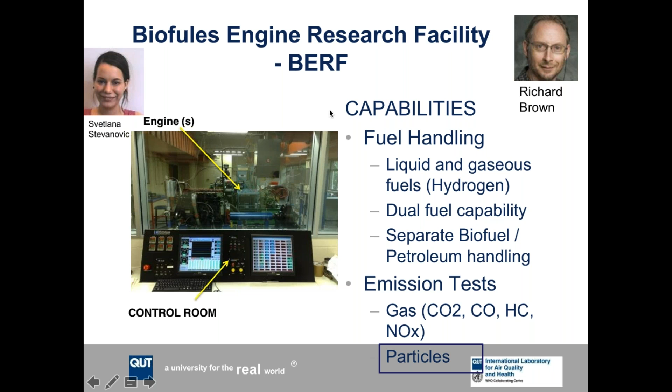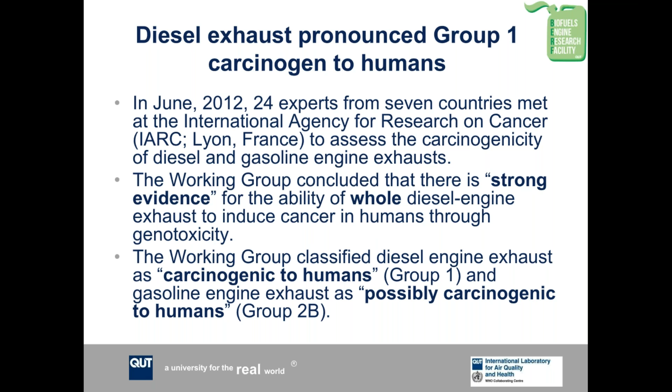So where's the interest coming from, and why are we so interested in diesel exhaust? One of the breaking important things happened in 2012 when diesel exhaust was pronounced carcinogen group 1 to humans. And also gasoline engine exhaust was pronounced carcinogen group 2B, so possibly carcinogenic to humans. This was really a groundbreaking thing because it got a lot of industries to look more seriously into the issue of diesel exhaust. And what was behind this decision was also a really groundbreaking, interesting study published in the same 2012, the Diesel Exhaust in Miners Study.

And I'm sure most of you know the background of this publication, that it was actually on hold or under litigation for years between the lobby groups from the mining industry and NIH, who was behind this. So it took them like 10 years, I think, until they got to publish it. But once it was published, it was really an important one, and it led to the decisions in 2012 by the WHO.

Also, an important point was when in October 2013 the WHO and IARC classified outdoor pollution as carcinogenic group 1, with particulate matter, a major part of this air pollution, evaluated separately. So these were all really important major studies and got a lot of the industry, especially the industry which I worked a lot with, which is the mining industry, to think twice on the quality of the fuels they use, the engines they used, and how to improve the emissions from their diesel engines.

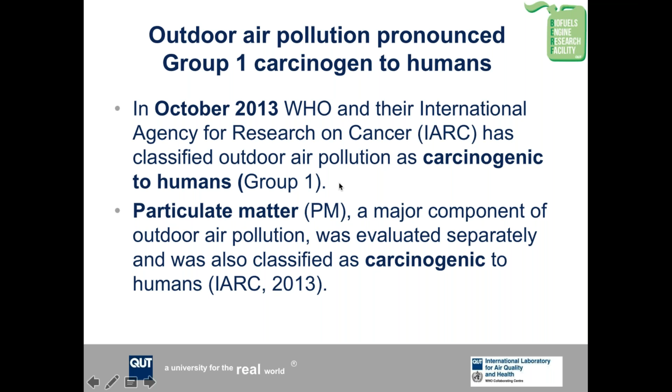So then we asked ourselves, why biodiesel? Why do we have to go to biodiesel? Well, we have to be aware that based on the current production scenario, we will be running out of oil that we dig from the ground. There are some estimates that we already reached peak production in the last few years, or we will reach it by 2030.

So we will be able to produce less and less, or dig less and less oil from the ground. So we have to find some other alternative for a sustainable carbon neutral transport. You know, we're all pushing at the moment electrical vehicles, etc., but it will still take some time before the electrical vehicles will really replace the normal fleet.

So that won't happen that soon, and therefore we have to look into the development of sustainable long-term alternatives, and biodiesel could be one of those sort of bridging stones until we come up with a totally carbon neutral or even carbon free transport, electrical vehicles, for example.

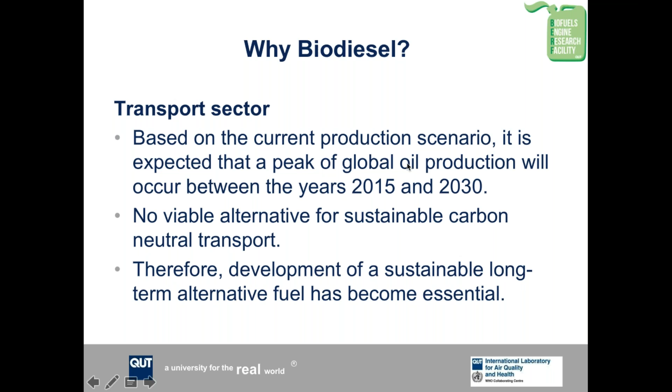One of the things that's important when we look at these biofuels is that biofuels come from various stocks, so various sources, and that also leads to a significantly different composition of the biofuel, and biodiesel specifically, as compared to your standard petrol diesel.

And the thing we wanted to look into is how the composition of biofuel first affects the primary exhaust emissions, so emissions that come directly from the exhaust, and then later on we'll talk about how the biofuels affect the secondary emissions, so the potential of the fuel to produce secondary emissions.

And the first study that we started doing in our lab was, slide to change, we looked into ethanol as a potential fuel in diesel engines. So we'll go into detail how we managed to get ethanol into a diesel engine. But let's say we had a device that enabled us to replace diesel fuel with ethanol up to 40% in energy, which means that 40% of the energy of a running diesel engine actually came from ethanol.

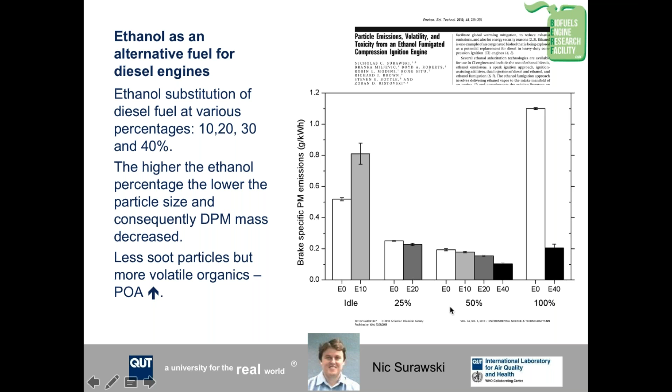And then we looked at how, at different loads, adding more and more ethanol influences the particle mass emissions. So we see this graph show up soon, yep. On the x-axis, you have the percentage of ethanol. So E0 indicates pure diesel, E10 means 10% ethanol, and up to E40, which is 40% ethanol. And the bottom part indicates the load of the engine, so idle to 100% full load.

So what's clear is that as you add more and more ethanol, your particle emission significantly drops down. Especially evident is this reduction between the particle emission at pure diesel at 100%, so full load, and when you replace 40% of the diesel with ethanol, you see a significant decrease in the total PM emission. So the question was, how is that achieved? This is almost a fivefold decrease in the total particle mass emissions.

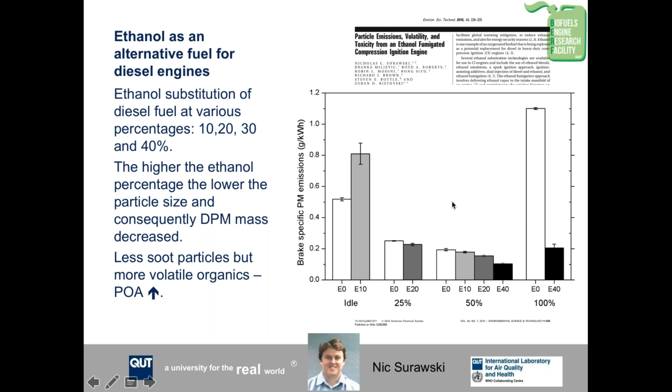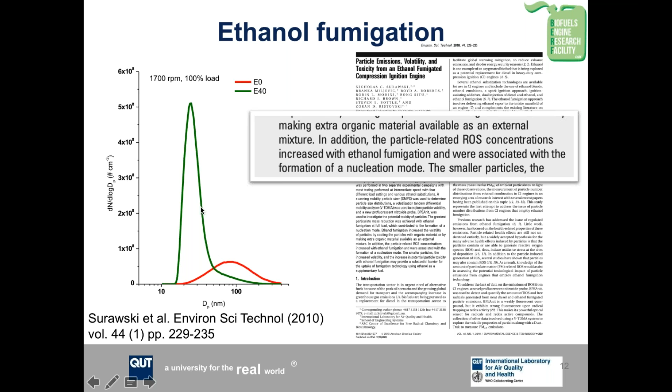And what we also saw, and we'll talk about that later, is that the oxidative capacity, let's say a measure of toxicity of the particles, also shot through the roof with the introduction of ethanol. So if you just follow purely your regulated emissions, you see that the regulated emissions significantly improved, but if you scratch below the surface, you see that there are many problems hidden there in the emissions themselves.

So then we continued in this direction and did more work where we looked at the particle emission for various different biofuels. So we used 3 different biofuel stocks, biofuels coming from soy, biofuels coming from canola, and tallow or animal fat. And then we mixed these biofuels at different blend percentages from 20 to 100% and looked at the particle emissions. And this is sort of what we got.

So on the x-axis, you have the blend of the biodiesel. 100 means pure biodiesel, and 0 means pure diesel. And on the y-axis is particle mass emissions. And we see that once we start adding the biofuels, the particle mass emission significantly goes down.

And also importantly, we see that there's a strong dependence on the stock. So some stocks, such as soy, have a smaller reduction than canola, etc. So there is some stock dependence, or compositional dependence of the emissions on the composition of the fuel.

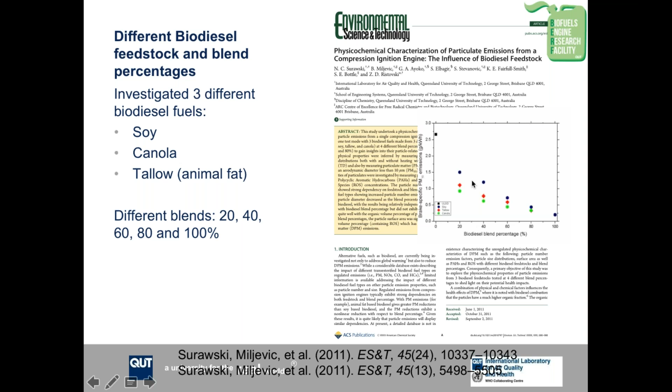So that's the particle mass emission. When it comes to particle numbers, the situation is somehow different. So we see that this is your pure diesel, and we see that even with certain blends, such as tallow or canola, you're getting the smallest particle mass emission, but your number emissions are even larger than diesel. So how is that possible? You're getting more particles in numbers, but less in mass.

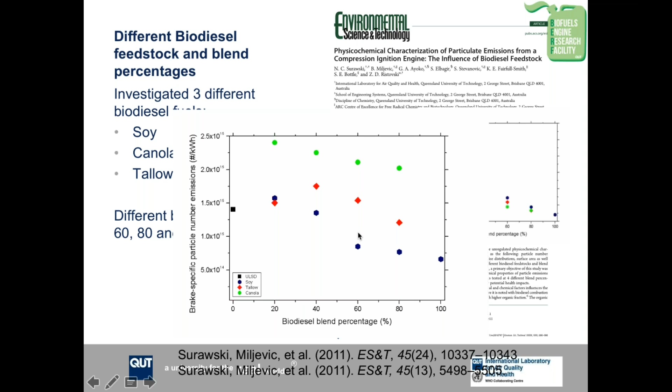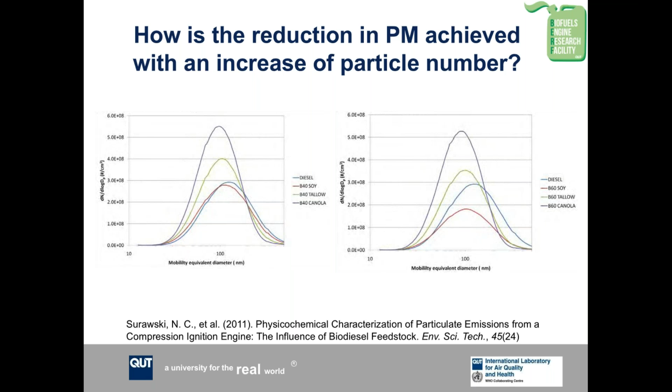So we saw that, yes, different stocks give different particle mass and number emissions, but we didn't really look in detail into the fuel composition. So then we did another study where we managed to control the composition of biodiesel in a much more controlled manner, and to look at the influence of the molecular structure, the structure of the biodiesel molecule, on nanoparticle emissions.

So for those of you who are not aware how most of your fatty acid methyl ester biodiesels are made, you start from a triglyceride, let's say tallow fat, and adding methanol in the presence of a catalyst, you break these chains and you get fatty acid methyl esters. The alkyl fragments depend on the fatty acid profile. So these are purely hydrocarbons, long chain hydrocarbons.

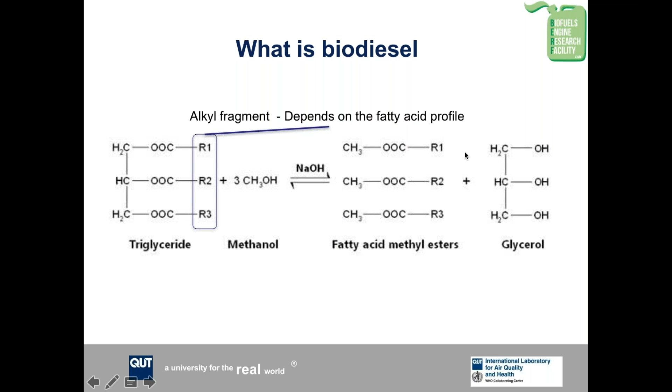So what we did, we managed to get our hands on a stock of biodiesel fuel coming from palm oil, which had controlled carbon chain lengths. So these alkyl fragments were of a controlled length. In your normal biodiesel, they're all mixed up, a mixture of various carbon chain lengths. We got more pure biodiesel, or these fatty acid methyl esters. And this just shows the composition.

So for example, our fuel, which we labeled C810, had mainly caprylic and capric acid, which had 8 or 10 carbon atoms in it. And then other fuels we had with a longer chain length, and then some fuels with a large number of different values of saturated and unsaturated bonds between the carbon atoms. So we wanted to look into how the carbon chain length in your biodiesel actually influences the emissions. So the question is, can we come up with an optimal composition of the fuel that would give the best performance of the engine, but at the same time give the best emissions?

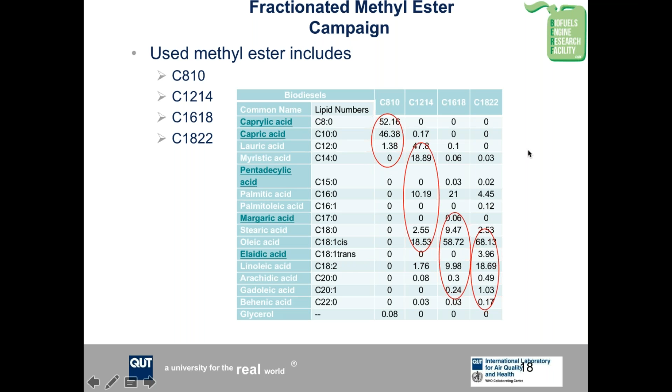So this is the molecule that we looked at, the biofuel molecule. And here we show for 2 loads. We can just look at one of the graphs. So we have the different fuels, 8 to 10 carbon chain length, up to 18, 22 carbon chain length. And this is the brake specific particle mass emission. So the more biodiesel fuel we add, so this is pure diesel, 20, 50, and 100% biodiesel, we see a significant reduction in the particle mass emission.

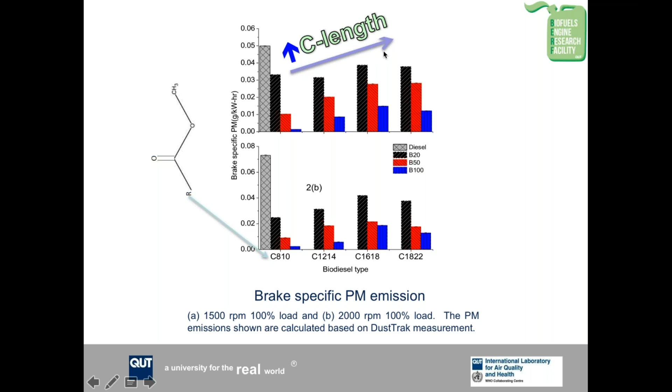But what is also interesting is that the shorter the carbon chain length, the smaller the mass emission for all possible blends. So when the carbon chain length increases, so does the mass emission. So what happens with the increase of carbon chain length with this oxygen? This carbon chain length becomes longer and longer, which means that the percentage of the oxygen in the whole molecule actually goes down. So if the oxygen percentage goes down, the PM goes up.

But also we see that if we have more unsaturated carbon bonds, the emissions also go down. So what you would want to have is a fuel with the biggest oxygen content and with the largest number of unsaturated bonds in between the carbons. And that improves your particle mass emission.

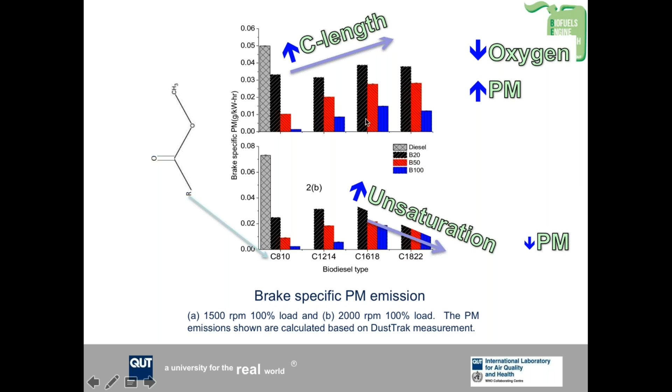So when we put that together, for all the fuels we tested, we found an interesting property, and that the specific particle mass emission in our case was proportional to the oxygen content in the fuel. So the more oxygen you had in the fuel, the smaller the mass emission. And actually in this case, an interesting thing is that the particle number emission also went down. So you were not only getting smaller particles, you were also getting less of them. So that was a fairly important thing.

We looked at other fuel properties and found that other fuel properties really didn't have a significant influence on the particle mass and number emissions. The trade-off is that your fuel consumption unfortunately goes up with the fuels with a higher oxygen content. So although you're getting better emissions, you are using more fuel. So that's the same slide with the particle mass emission.

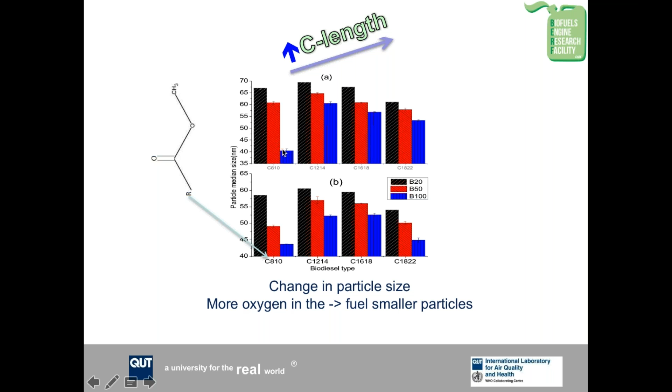So the question we asked ourselves is, why are particles becoming smaller? What makes the soot particles from biodiesels smaller than particles coming from your normal fuels? So we did a study where we collected these particles on transmission electron microscope grids and then looked at the structure and the size of the particle. This is a typical example of a biodiesel particle.

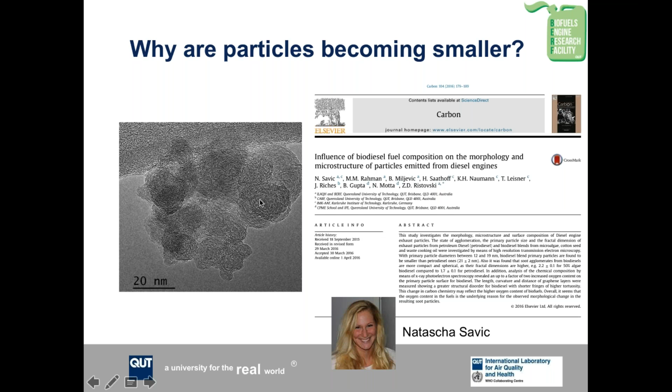So what you see is that it consists of these smaller primary particles. They are sort of agglomerates in structure. This is even nicer. So that's your typical biodiesel particle. You see they are agglomerates of primary particles. They are around 100-ish nanometers, or these were around 200 nanometers in size, and they consist of these primary particles, which are somewhere around 10 to 20 nanometers in size.

So what we found is that the more oxygen content we have in the fuel, the smaller this primary particle will become. So this is your diesel, and this is 50%. This is some diesel made out of hydrogen, I won't go into that. But with 50% biodiesel, the primary particle size was going down. And we repeated this study, and we're currently running a similar study looking in much more detail and at a larger oxygen content, and we are clearly seeing that effect. So the way biodiesel achieves a smaller mass emission is by producing smaller primary particles.

We also looked at the structures of these primary particles in a high resolution transmission electron microscope. So what you see here, this is a layer of carbon atoms. There's another layer of carbon atoms. So you see that these primary particles have this core shell structure, and the distance between the layers also depends on the percentage of biodiesel, with biodiesel having a smaller distance between the layers.

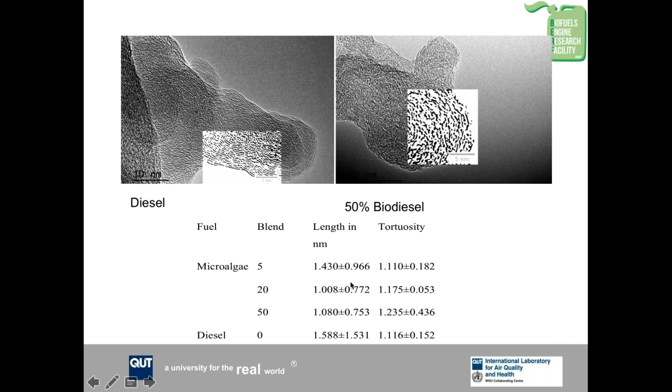But what's more important is that we found that in the soot emitted from biodiesel, the bonding in between the carbon atoms is more prone to so-called sp3 hybridization than sp2 hybridization. What does that mean? That means that the atoms in soot coming from biodiesel have more of an amorphous structure than atoms in soot from diesel engines, which have more of a graphitic sp2 layer structure.

But also important is that biodiesel soot has a much larger percentage of oxygen atoms on its surface, which means the soot is more oxidized. And this could be one of the reasons that a number of studies have found that cells exposed to soot with larger oxygen content on the surface show a bigger response and it seems to be more toxic. So we are now repeating this study in much more detail just to confirm if this is valid for various biofuels. This was done only for one type of biofuel.

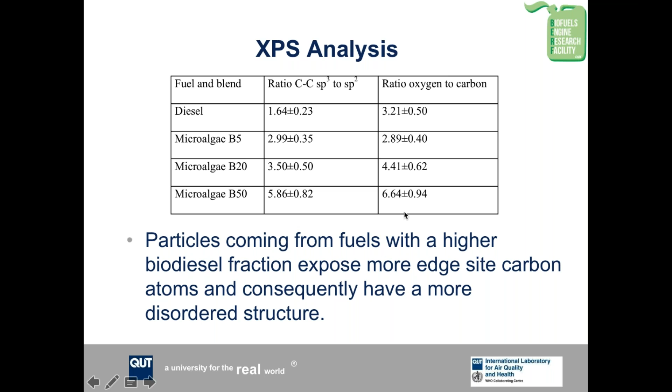We also looked into characteristics of engines running biodiesel in transient emissions. All the previous studies were done at steady state. So you load the engine at a constant load and you run it, and then you look at the particle emissions. Then we also looked at transient, so how you drive the engine in normal conditions. On the road, you would go faster, slower. And then we looked at the advantages and disadvantages of having biodiesel. So the main advantage, again, is that your PM and PN number, particle mass and number emission, goes significantly down.

But the disadvantages are the known ones: NOx goes up with biodiesel, and also a significant decrease in engine power, which means there's more fuel consumption in the whole thing. So this was all purely looking at particle physical properties.

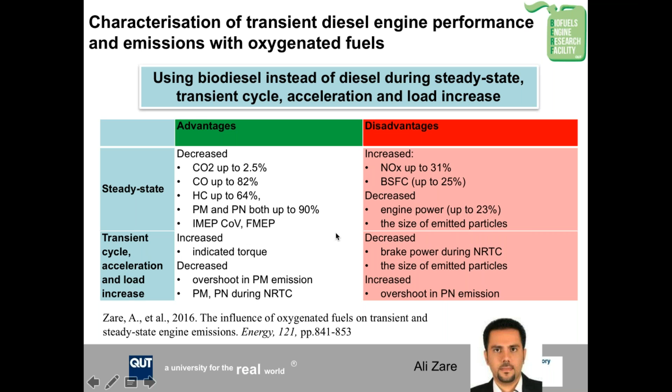So let's make a small stop and a digression, and I'll talk now on the relationship between particulate matter and health effects, and how we developed methods to measure or to estimate the oxidative capacity of particles. So why is the oxidative capacity of particles important?

Because one of the proposed mechanisms of why particles, any particles, are toxic, and specifically combustion generated particles, is that the particles carry on themselves free radicals or reactive oxygen species. Once they get into contact with human cells, they cause oxidative stress, which leads to inflammation, cell injury, and eventually death itself. So the measure of the reactive oxygen species should give an indirect way of measuring the toxicity of the particles.

So I'll skip one slide. So our motivation was, as I said, to develop a cell-free assay, an assay which we would use without the presence of a cell for routine screening of the oxidative potential of particulate matter. So looking at what oxidative stress a particle would be able to put upon a cell once it enters the cells. And we are also developing monitors of that.

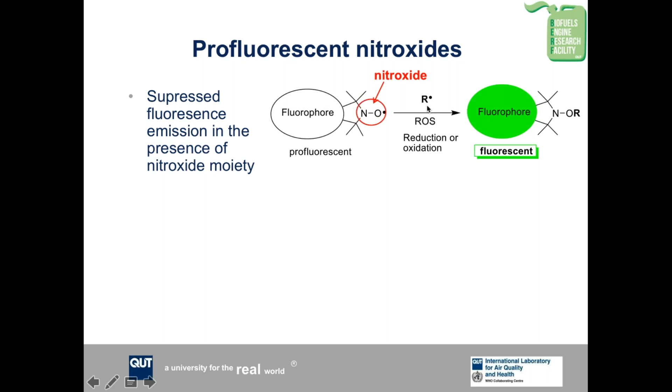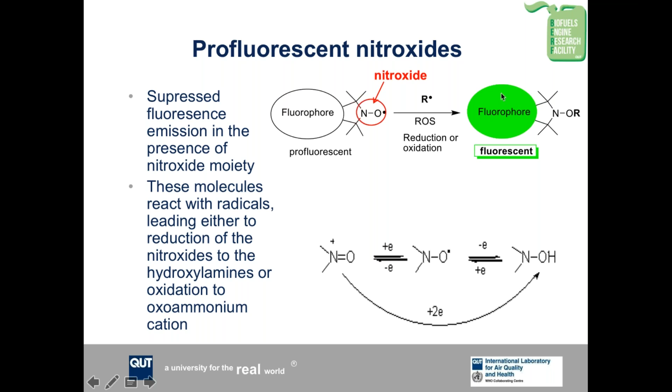So if the profluorescent nitroxide reacts with a molecule of any kind of ROS, then it will become fluorescent. And that's the process, simple as that. What we have to do is find a way to get the reactive oxygen species on the surface of the particles to react with these nitroxides, and then measure the change in the fluorescence. So to do that, the fluorescence of the fluorophore is really important.

If you want to apply this method to measure the oxidative capacity of combustion generated particles, specifically diesel, your fluorophore has to have an excitation wavelength which is not too low, so you would not initiate the natural fluorescence of diesel or any kind of combustion aerosol. So the natural fluorescence of combustion aerosols will not overlap with your fluorophore fluorescence. And for that reason, we found that the most optimum molecule is this one. I can't even say the full name.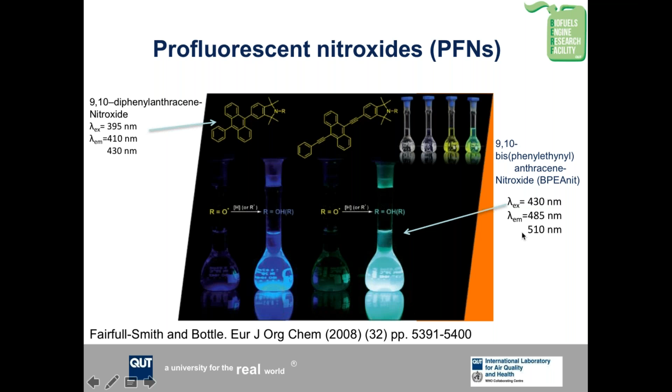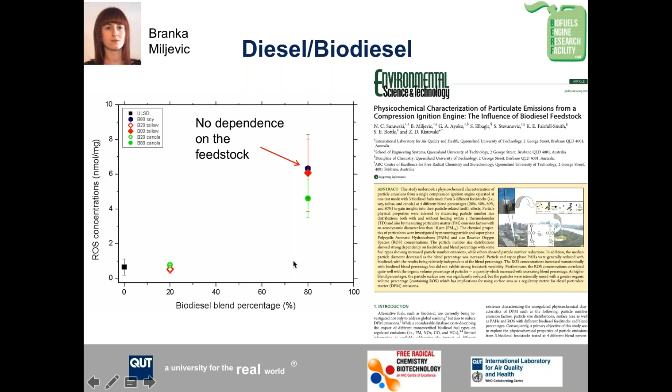So going back to the measurement that we did with the biodiesels of different composition, if you remember, the particle mass emission goes significantly down, but what we found is that the concentration of reactive oxygen species per milligram of particulate matter significantly goes up with more biodiesel in it. And interestingly, we didn't see any dependence on the feedstock. So the more biodiesel you have, less particle mass, but the oxidative capacity is larger. We found an interesting correlation between the organic volume percentage on the surface of the particles and the concentration of reactive oxygen species.

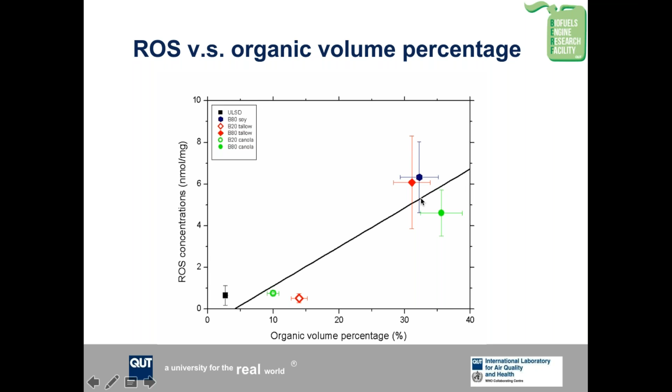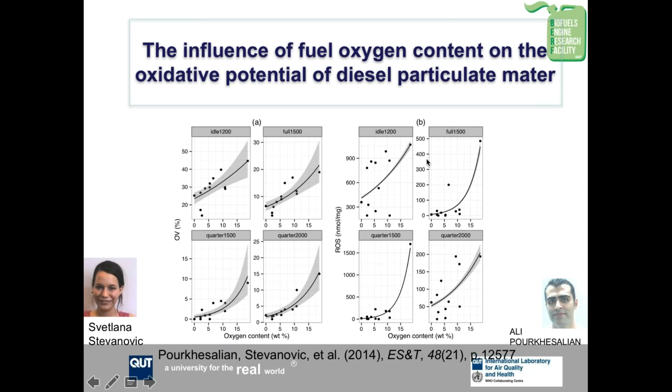So if we try to plot the amount of organic material on the particles versus the reactive oxygen species, the oxidative potential of particles, we actually didn't get a good correlation.

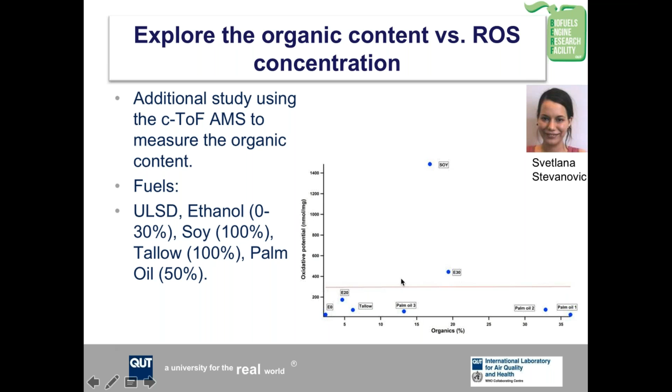So this is the percentage of organics for various fuels tested, and this is the oxidative potential expressed as concentration of reactive oxygen species, and we see the correlation is a little bit all over the shop. So what we did is we looked at the actual chemical composition of the organic materials that are on the surface of the particles using our aerosol mass spectrometer.

And with this device we use two specific m/z values, m/z 44 and m/z 57, when we look at the composition of the organics. This is the m/z mass. m/z 44 is a marker of the so-called oxygenated organic aerosols, and m/z 57 is a marker of hydrocarbon-like organic aerosols.

So what we find is that with more biodiesel, the larger the fraction of oxygenated organics is versus the non-oxygenated, the hydrocarbon-like organics. Then we said, okay, is there a correlation between the amount of oxygenated organics and the reactive oxygen species concentration or the oxidative potential?

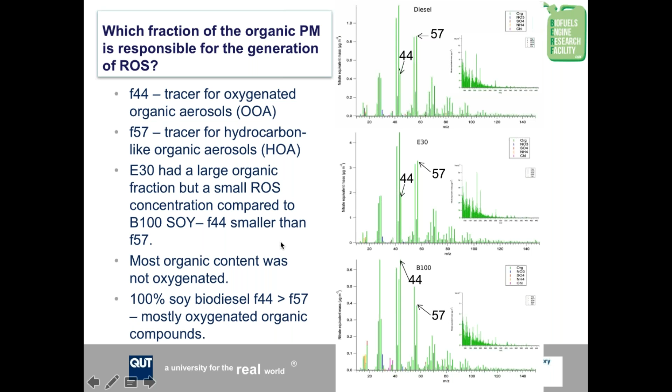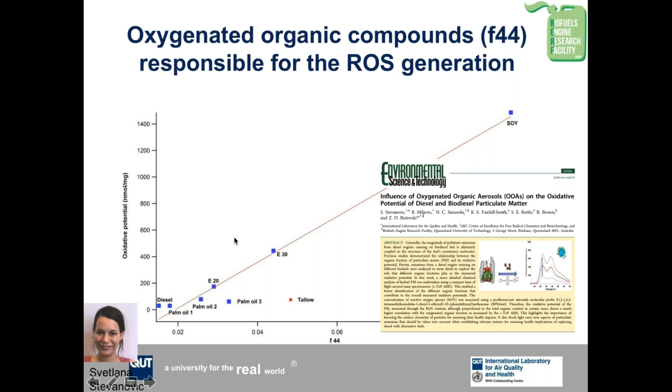And when we put the percentage of oxygenated organic aerosols on the x-axis, so what fraction of your organic material on the surface of diesel is oxygenated, we got a nice linear relationship for some of the fuels we tested. So the more oxygenated your organics are, the higher their oxidative potential is. And we repeated that study with various different fuels, and every time we get sort of a nice correlation between the F44 fraction of oxygenated aerosols and your oxidative potential.

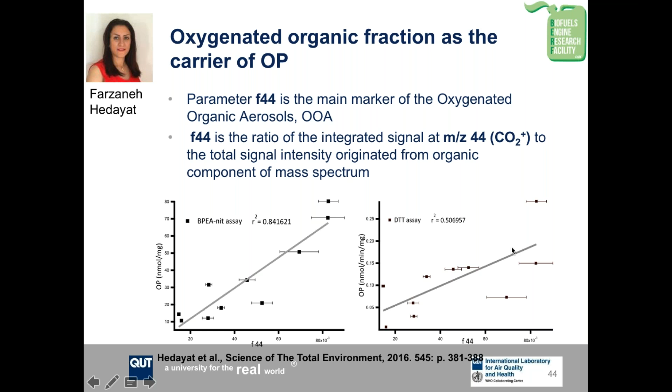And we even tried that with different types of assays to measure the concentration of reactive oxygen species, such as the DTT assay, and we always find a similar or fairly good correlation independent of the assay we use. And that also confirmed that the oxygen content is fairly proportional to the oxidative potential in the fuels that we have tested, and that the oxygen content is also proportional to F44. So the more oxygen you have in the fuel, the more oxygenated organic aerosols you will have on the surface of your particles.

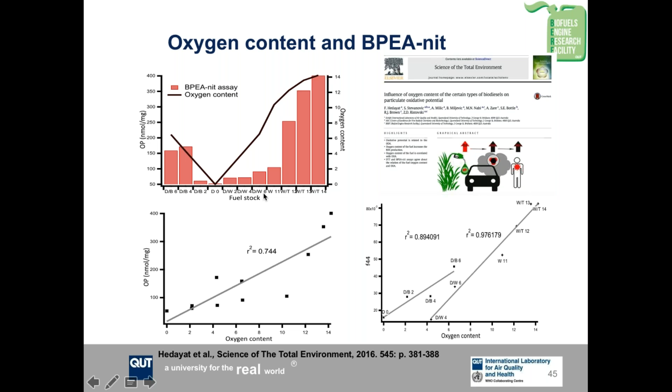And what we see, the more oxygen in the fuel, the more oxygenated your organic material will be, and therefore more of it will stick to the particle phase. So more oxygenated organics have a smaller saturation vapor pressure, and they more easily condense onto the particles, but they also increase the concentration of reactive oxygen species. So in fuels with high oxygen content, most of your reactive oxygen species is in the particle phase, and less in the gas phase.

But this also raised the issue of the importance of the concentration of reactive oxygen species coming from diesel or any kind of combustion emissions in the gas phase. It is still significant. So to summarize, the ROS concentration, although proportional to the total organic volume percentage, shows much higher correlation with the oxygenated organic fraction.

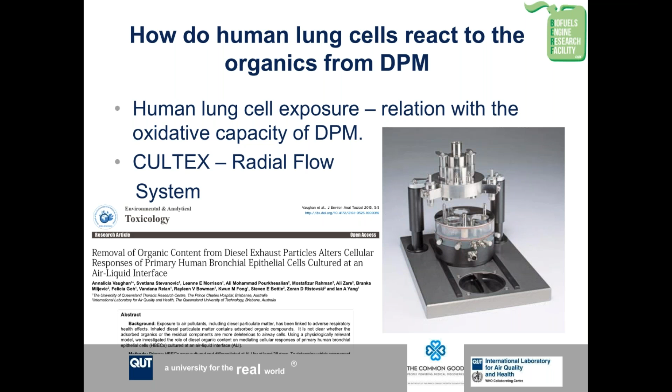And to confirm this, we continued, and I'll have to be quick going through these few remaining slides. We did some exposures of human lung cells as well. So I wanted to look at how human lung cells react to organics from diesel particulate matter. For that, we use a Cultex system where we are able to directly expose the human lung cells to diesel exhaust. So we don't capture diesel exhaust into liquid and then mix that liquid with the lung cell culture, but we directly expose the human lung cells to a flow of diesel exhaust.

So we started with our diesel exhaust with the organics on the surface. And then we have a way to remove these organics using certain methods and expose the cells only to particles without these organics. What's important is that only 10 to 20% of the mass has been removed by the evaporation or removal of organic material. And this is the response of the cells that we got.

So you have the cell viability on the y-axis. This is the baseline. This is filtered air, so diesel exhaust passed through a filter where all the particles have been removed. This is normal diesel exhaust, let's say diesel exhaust with the organic material. And this is diesel exhaust with the organics removed.

So we see that the viability of the cell for short-term 30-minute exposures was much larger when we removed the organics. When we went to longer exposures, the situation actually changed. We are not sure what was the reason for this significant difference.

Another important thing, tying these organics to the oxidative capacity, is when we looked at the concentration of IL-6, which is a marker of how much the cells were stressed as a function of different exposures. We see that when we expose to neat diesel, meaning diesel with the organics on the surface, the concentration of IL-6 is significantly larger than with the organics extracted. So we can tie the organics on the surface to the stress or the reactive oxygen species that they carry.

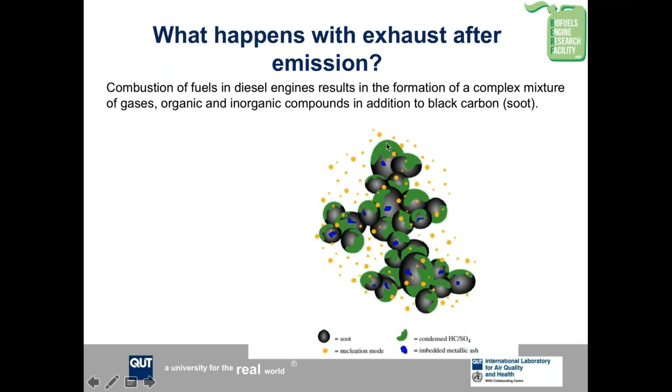So further studies that we are going to conduct look at what happens with diesel and biodiesel emissions. We want to understand what happens with the exhaust after it's emitted. When we combust diesel or biodiesel in general, we get the soot. That's the black carbon, if you remember those pictures from the electron microscope. On the surface, shown in green, we noted the organics which condense, but we also get some tiny nucleation particles.

But what also comes from the exhaust is the volatile organic compounds, which are in the gas phase. When the exhaust is emitted into the atmosphere, these volatile organic compounds react with sunlight, OH radicals and ozone, and some of them get oxidized and start condensing onto the surface of the soot particles, adding additional organic mass. The organics on the surface of the soot particles also react with the natural oxidants in the atmosphere and change composition or become more oxygenated.

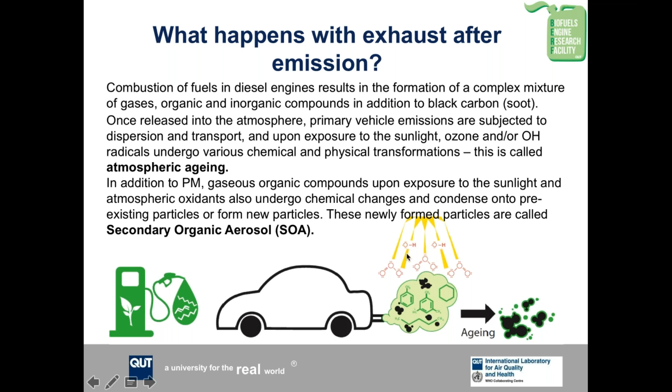The problem is that, with the exception of the population that lives close to busy roads, the majority of the human population is exposed not to fresh exhaust, the kind we measure directly in our lab from emissions, but to aged exhaust, exhaust which has spent a significant amount of time in the atmosphere. And that's the studies we are currently conducting. We are looking at the changes in the particulate matter when we age it in the atmosphere. I'll have to shorten this presentation.

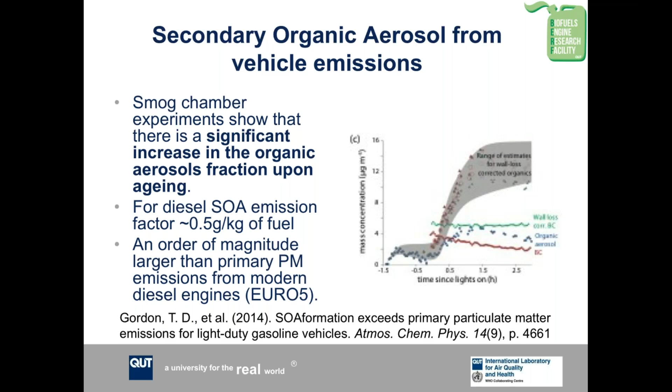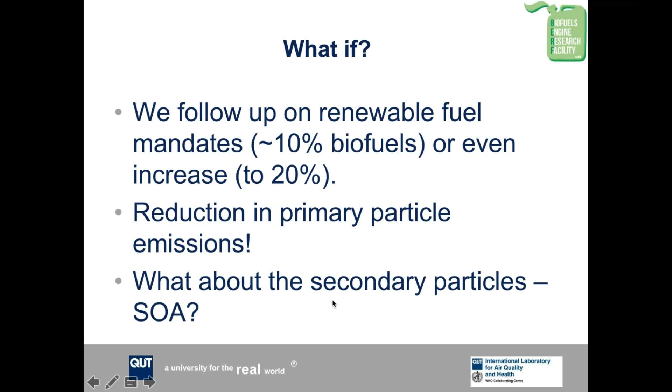One of the questions we want to ask ourselves is, what if we follow the biofuel mandate? We mandate that 10% of all fuels sold have to be biofuels, and even increase it to 20%. What we know is there will be a significant reduction in primary particle emission. There is no doubt. Will they be less or more toxic? It can go both ways. But what we don't know is what will happen to secondary particle emission. If we cut primaries, will we actually increase secondary particle emissions? These are the studies we are conducting now.

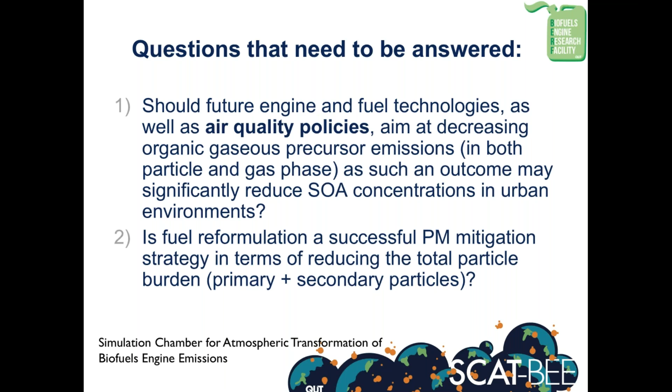We are looking at secondary aerosol production from various biodiesels. We want to know if increasing the consumption of biodiesel in an urban environment, or these future policies, will lead to a total increase in the particle loading in an urban atmosphere due to secondary emissions or not. We do that using our smog chamber, and these are the experiments currently, as we speak, being done in our engine lab.

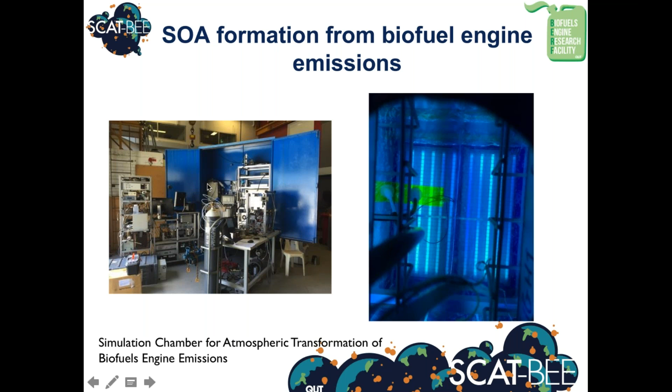It's a Teflon bag of 8,000 liters, which we fill with diesel exhaust. Then we turn the UV lights on. It's inside this trailer. Then we grab a sample, and with a number of mass spectrometers and different gizmos and gadgets, we measure the composition of the diesel particulate matter after it's been exposed to simulated aging conditions. So to conclude, we need to develop a clear understanding of the mechanisms that drive secondary organic aerosol formation in order to develop new urban transport solutions. The question we ask ourselves: will biofuels really be that promising clean technology or not?

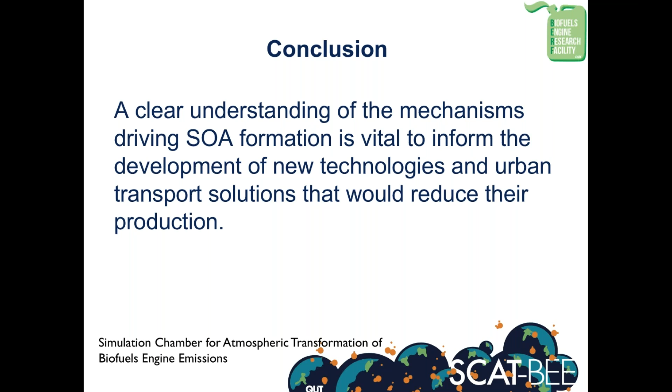They consider Thomas J. Midgley the most toxic single organism that ever lived on the surface of the Earth, having more negative impact on the atmosphere than any other single organism. What he did is look at two engineering problems and solve them, without looking at the environmental effects of his solutions. And that's what we always have to take into account in developing new fuels or new technologies for vehicle emissions.